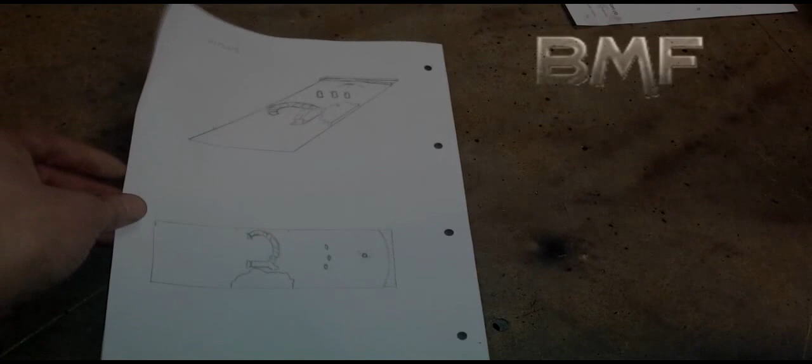Okay, so what we've got is these - let's see, can we see that there? Yeah, okay, we can see that. Let's put that by there. Okay, alright, we can see that. And can we see this one as well? Yeah, there we go. Okay, right.

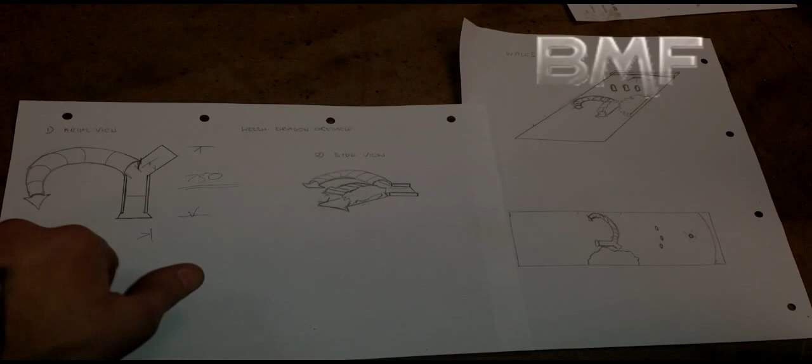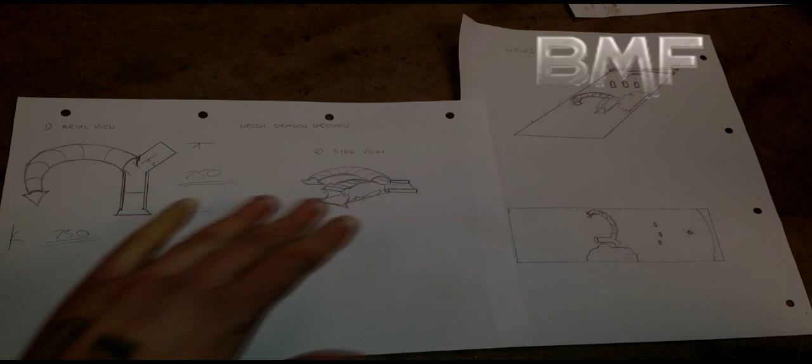Now these are the actual sketches that James, the customer, brought to me. There's no real dimension or anything on there - the 750 I put on afterwards, because their course is roughly about a meter or so, I think it's like 1100 wide. So basically the only dimension I've got to stick to is that this actual obstacle has got to fit within a 750 by 750 square. Within that square I've got pretty much free reign.

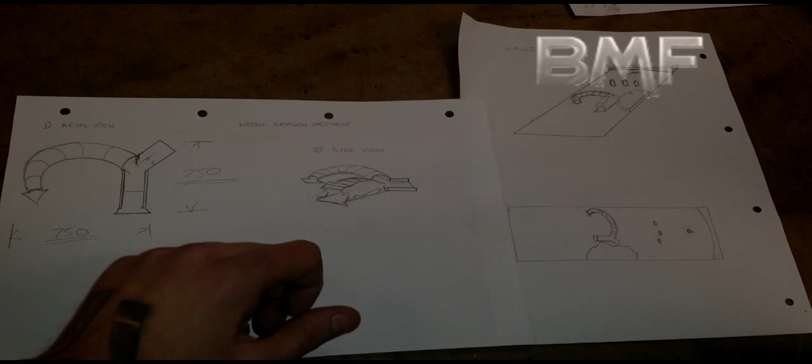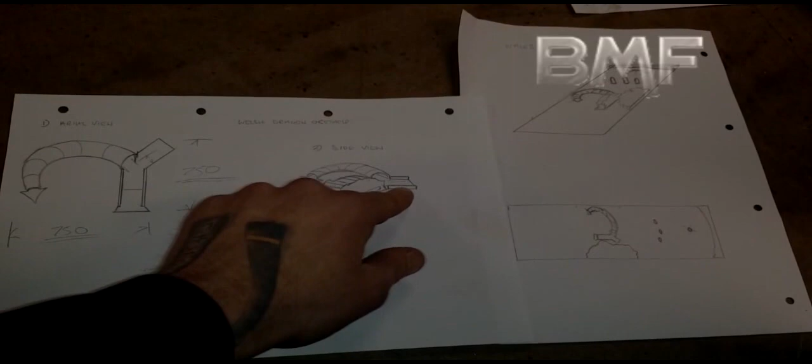Now what they already have is these pieces here - it's not a bad drawing, to be honest, not a bad sketch by James. What they already have is these laser cut dragons. So basically we're going to make this sort of covered section here, and the bottom track there with the slide-up stands on the track, and the actual dragon profiles are probably going to be riveted to the side of it.

What's going to happen then is it's not actually going to be like this, because the actual dragon is quite sharp and spiky, so we've got to get rid of those sharp edges, because this is going to be used by the public and we don't want anybody falling on it and hurting themselves and suing us. So we don't want to alter the dragon too much really, because that's very pretty.

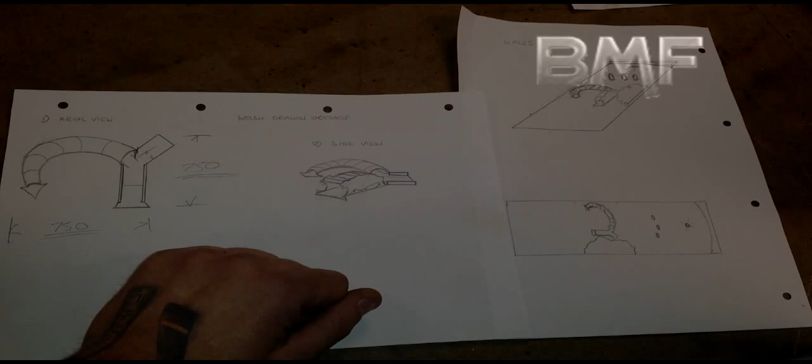I've got a photo somewhere of the profile - perhaps I'll try and stick that up in the next video so you can see it. It's really quite good. Whoever made it, it looks as though he's used a TIG torch to put heat marks into it and discolour it, but the discolouration forms sort of the scales, and it's very, very clever. I'll show you if I can get a tidy picture of it, because it's quite clever what he's done.

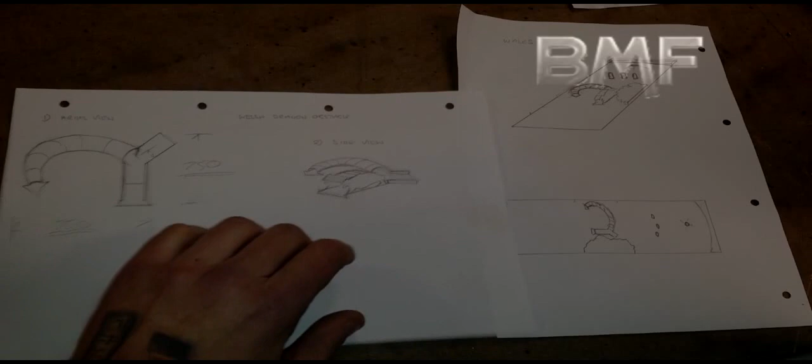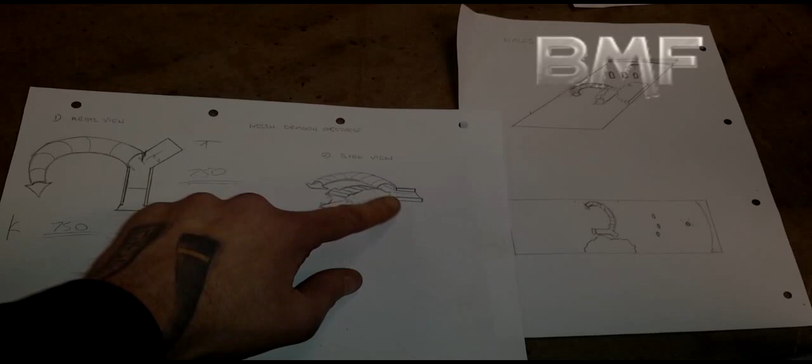But yeah, so this piece here - this is probably going to show a nice curve, and I think it's probably going to get powder coated green, so it's going to look like sort of rolling hills behind the actual dragon itself.

Then I think, as much as they'd like to leave it natural, because of this beautiful work that this guy has done with TIG torch, I think they're actually going to have it powder coated red, so it contrasts against it. We're probably going to have a matte powder coat green on this section, and then the gloss red dragon.

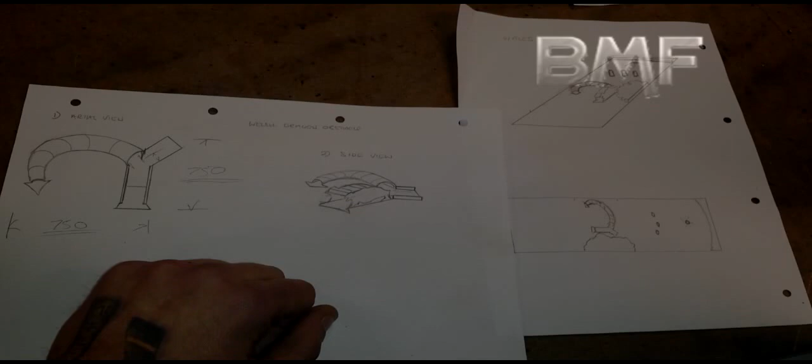So this piece is not particularly difficult to make. We'll probably show a little bit of it, but we're not going to go too mad on it, because basically it's just a bottom, two sides, and perhaps a bit of rolling in the top to form the curves.

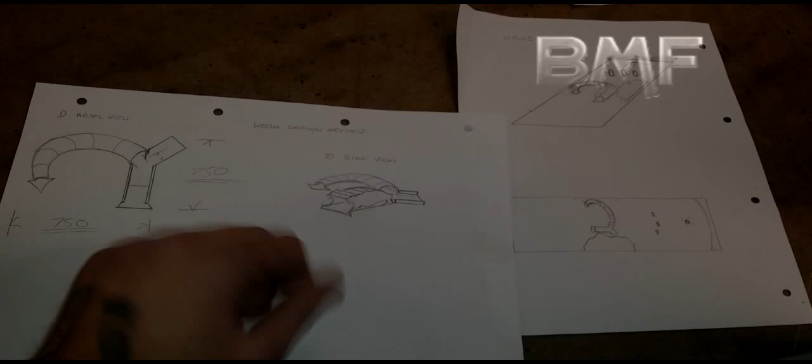The interesting bit is the actual tail, the actual meat of the obstacle. Now, I think when I draw it, the actual reduction is probably going to be slightly more exaggerated than what it is there, so it looks a little bit more tail-like.

So like I said, we're probably going to be around 150 or 6 inches across there, and then we're going to come right down to just slightly bigger than the diameter of a golf ball here.

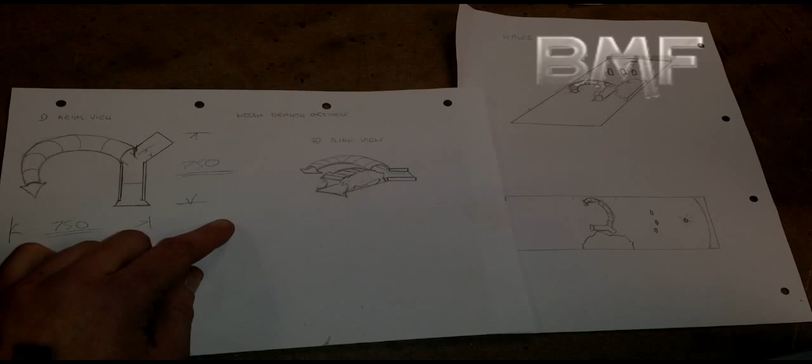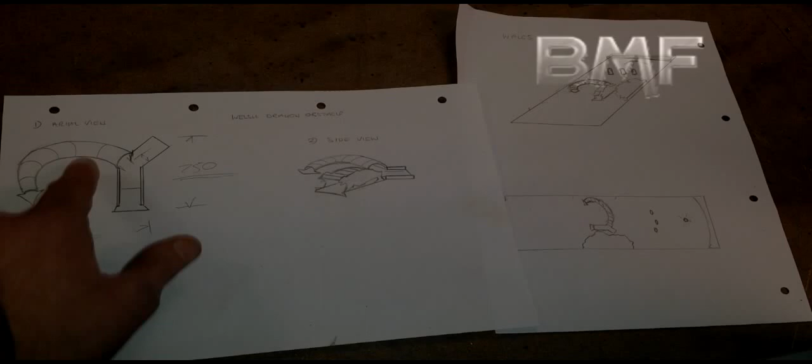So the pattern itself is going to basically encompass this reduction in diameter and the segments. Like I said, I think we're going - this is showing like 180 and then coming back down, but I think we're probably going to go a bit more than that, bring it right round to maybe 200, 220 degrees, so the ball comes back along this way.

So there's a few patterns involved with that. We need to do one firstly for the actual reducer, or the reduction, the cone part of it, and then we need to form our segment patterns actually onto our reducer pattern.

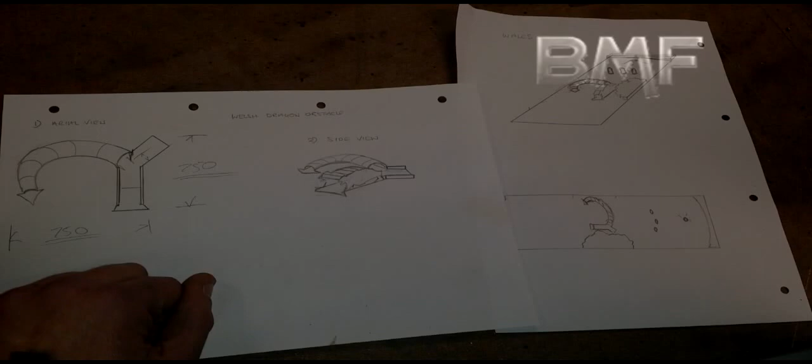There's a few ways that we can do the reducer itself, and we'll probably show perhaps both of them, because they're both useful in their own way. One is very quick, but only works up in a certain size range of reducer. The other one, there's a little bit more to it, a little more complicated, but it can be used for pretty much any size reducer you can possibly imagine - anything from down to sort of 50 mil diameter, right the way up to a couple of meters in diameter. So we'll probably spend a little bit more time on that method.

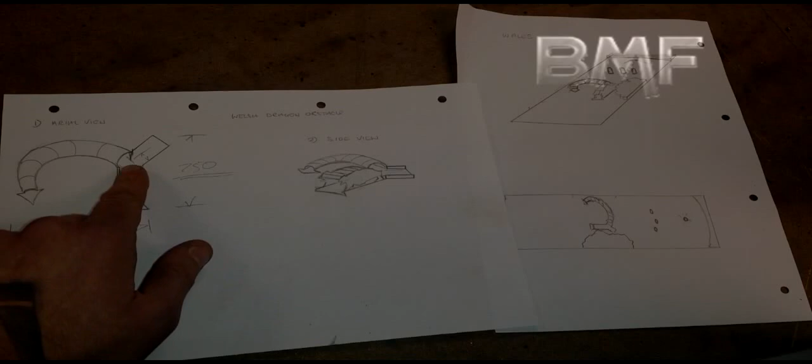There's also a method then, which comes from the second method, by triangulating, whereas you can form the pattern in one step, rather than forming each single reducer, because obviously each of them is going to reduce equally - so it's going to go from like 150 diameter down to 130, from 130 down to 100, from 100 down to 80, from 80 down to 70, from 70 down to 60, and so on and so forth.

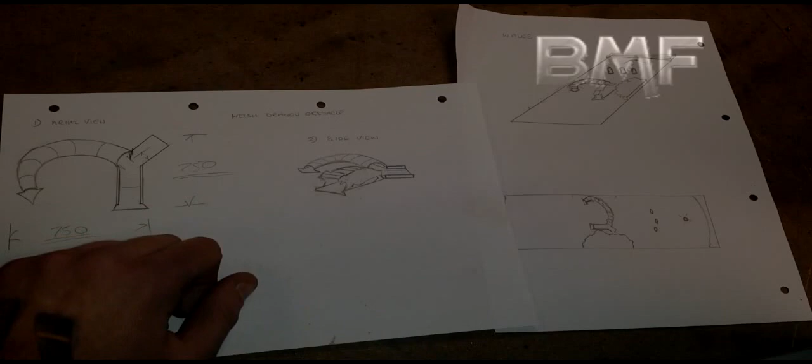But there is a way of doing it using triangulation. That means we can actually draw this shape, and actually triangulate off that drawing, and form our reducing segmented bend from one drawing. So we're probably going to have a look at that as well.

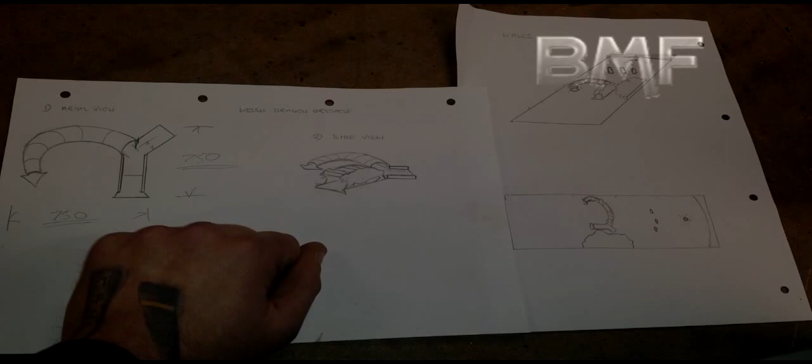So like I said, it's going to be interesting. It's not by any means going to be a how-to. I mean, the subject of pattern development is absolutely vast, and certainly a 20-minute YouTube video is not going to come anywhere near covering it. But hopefully anybody who's doing pattern development, or has a little bit of experience in it, or if no experience whatsoever, may gain a little bit from it.